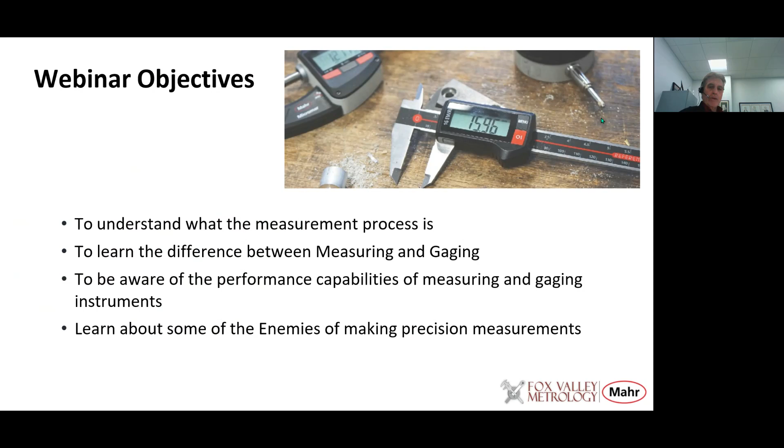Well, good morning everyone, thank you for attending today's webinar, and thanks for the introduction, Jane and Amy. What we're trying to do today is give you a little background about the basics of measurement. Measurement's always a fun topic for me, but really we have to think about what's happening to make a good measurement. Today we'll talk about what the measuring process is, learn the difference between measuring and gauging—terms we often use interchangeably but which really have differences. We'll look at the performance capabilities of different measuring and gauging instruments, and then look at some of the enemies of making precision measurements, because nobody wants to lose microns during their day, maybe drop them on the floor and slip on them as we walk by. So we have to keep those microns under control.

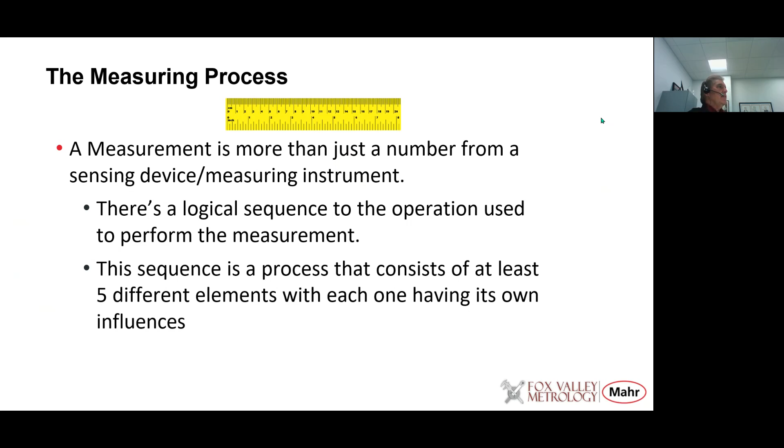So what is the measuring process? I think the measuring process is more than just a number from a sensing device or measuring instrument. We talk about 5 degrees Fahrenheit or 30 inches long—basically a number and some standard unit, either inches, millimeters, degrees, or whatever. But really, to get that number, there's a logical sequence to the operation used to perform that measurement. This sequence is a process, and I think that process consists of at least 5 different elements, each with its own influences.

So if you look at this photo, this is one of our operators out on the shop floor at Mahr measuring some bezels for dial indicators. If you look at this picture, how many different elements make up this measuring process? Let's take a quick look and see if we can find them.

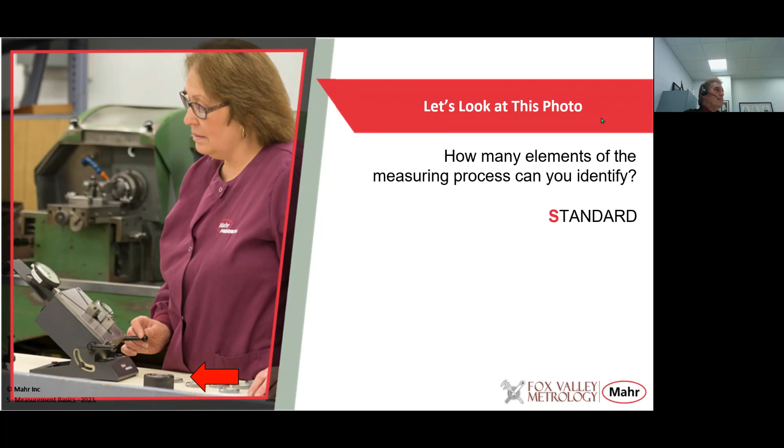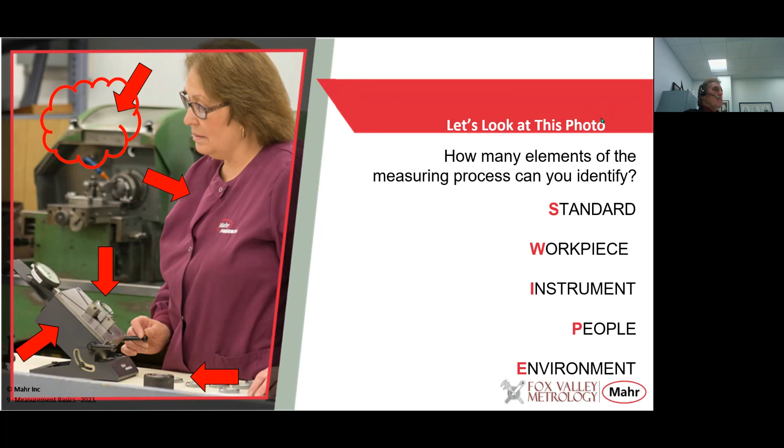The first one we have is, in this case, a standard—this is a master ring, which we have to have as some type of reference to begin our measurement with. Then we have the workpiece itself, the part that we're measuring, and the instrument or gauge or tool that we're making the measurement with. We need to have an operator, somebody making that measurement, or the people involved. And finally, what surrounds us here is the environment, and the environment is sometimes the biggest influence on the measuring process.

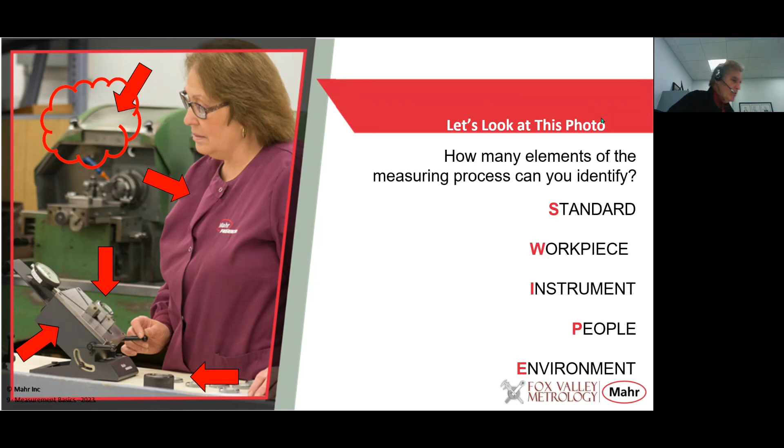One thing that's fun to remember is that an easy way to remember things is by an acronym, and you can see what it is here: SWIPE. The measuring process consists of 5 different things, which we can remember by thinking about SWIPE.

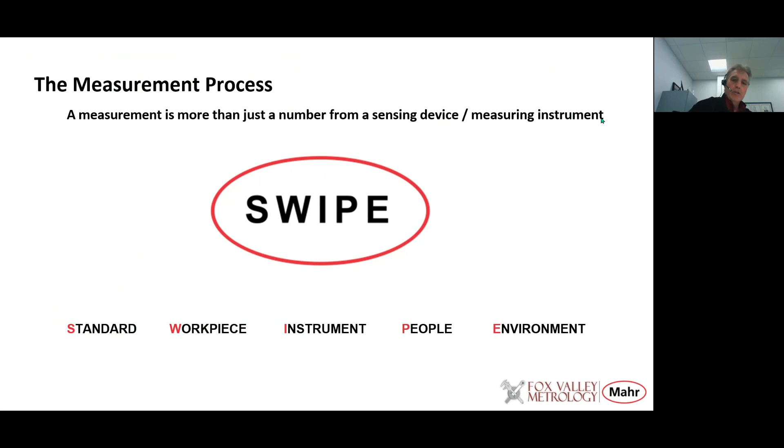The standard, the workpiece, the instrument, the people, and the environment. A little cheat sheet we like to use in the gauging world is that the instrument, the I, is only 1/5 of the measuring process. So a lot of people call up and say your gauge isn't working right, but our technicians are trained to look at the whole measuring process to make sure there isn't something else influencing the instrument to produce inaccurate readings. If you can remember SWIPE, I think you can go a long way to improving the measuring process.

Now let's take a quick look at these 5 parts. The standard is the master. It could be a gauge block, a master ring or disc, some pins. It could be the internal scale that's inside the micrometer or the caliper or the length measuring instrument.

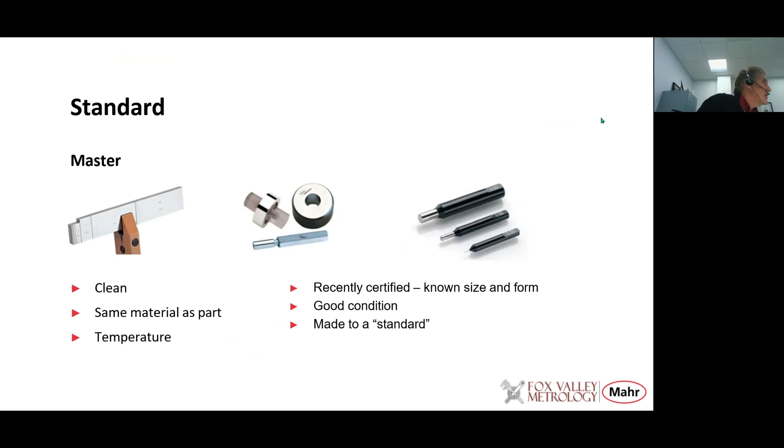But the standards all have to be clean. We like them to be the same material as the part, all stabilized to room temperature. You should know that they've been certified, and you know what the size and form is. They're in good condition, no burrs or rust or nicks on them. And usually these standards are made to some international designation, like a DIN master or an AGD ring, or whatever the ANSI standard is for these standards.

The same characteristics also apply to the workpiece. It should be clean, same material as the master and the gauge, in good condition. You want to keep it clean—any burrs, oils, grime from the machining process should be cleaned off of it.

It should be temperature stable, which means if it's some process that produces a lot of heat in the part, you should give it a minute or two to stabilize and get the temperature down. You should understand the form and finish of that part and how they can affect the measuring process, and be aware of any special characteristics—is it a thin wall, or a compressible material? What's the surface finish of it? All of those things can affect the measuring process.

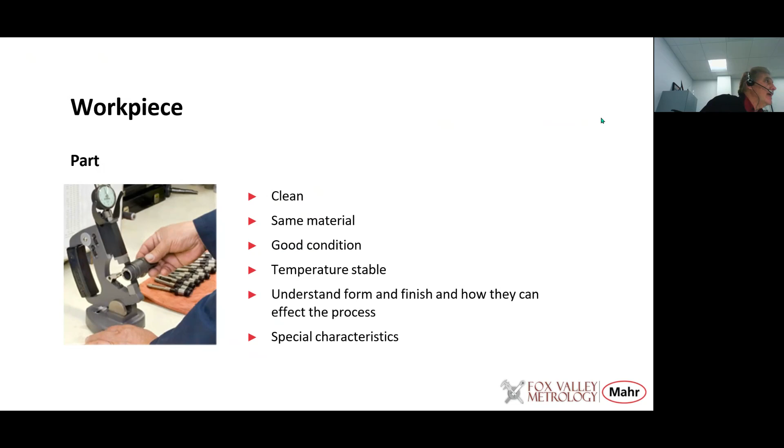Here's an example of how geometry can affect a measuring process. Most micrometers, calipers, two jet air plugs, ID fixed plugs, and so forth are two-contact systems, and they're great for measuring parts which have an even number of lobes, like the picture on the left upper there—you can see that has a major and minor diameter, or an even number of lobes. So that 2-point contact system is going to do a great job measuring the smaller or larger diameter of that part.

But if you have a part that has an odd number of lobes, in this case 3 lobes, that 2-point contact system is not going to do a very good job of measuring the part. It's going to produce the same diameter anywhere as you rotate that gauge through the part. So it's important to understand the form of your part to ensure you have the proper gauging system for it—we can make a 3-point measuring system. These are items where, for example, you're making two parts, an ID and an OD, and they're not fitting together even though the gauges say they are right. It could be a form error causing that problem.

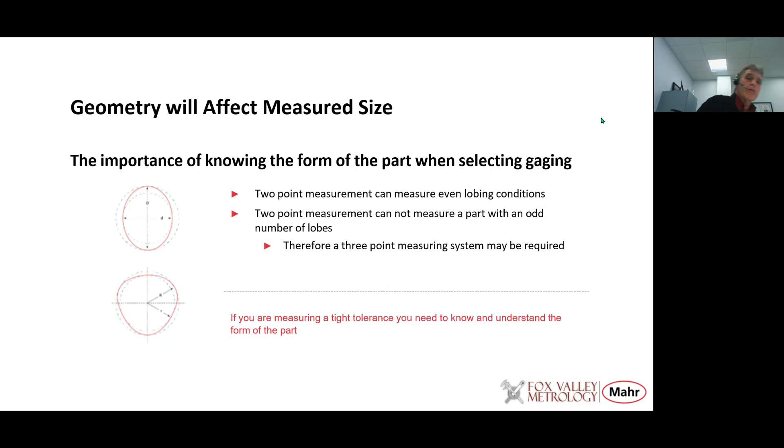Let's take a look at the instrument. Usually the tighter the tolerance, the capability of the gauge, the more mass it has—so bigger is better when it comes to gauge stability. It should be mechanically sound, everything tight, appropriate for the tolerances being measured. The gauge should be repeatable, have the proper resolution, and make it as simple for the operator to use with as little operator influence as possible.

Sometimes instruments are made to a standard, especially if you're measuring compressible materials—they should be made to the proper gauging force, contact diameter, etc. And that type of gauge takes into account any special characteristics of the part.

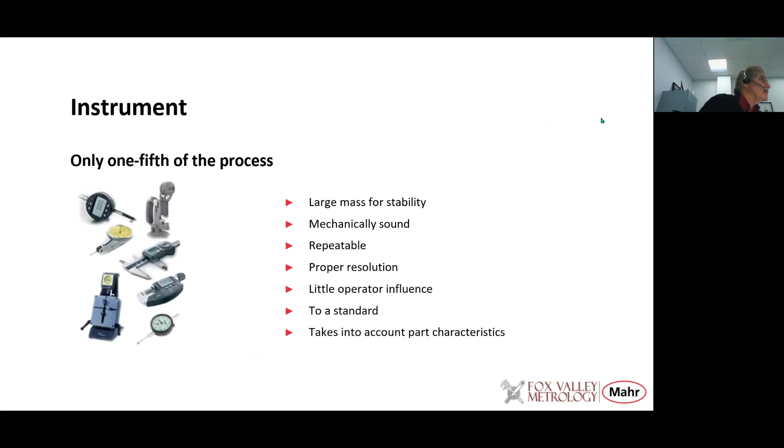Now, the part can have surface and form errors, and these can show up with air gauging, for example, because with an air gauge we use back pressure to measure the diameter. If that surface is too rough, the gauge can actually think it's measuring further down into the surface than the peaks, whereas a contact gauge on the right here measures only the peaks. So again, it's important to know the surface of the part, as it affects the gauging process.

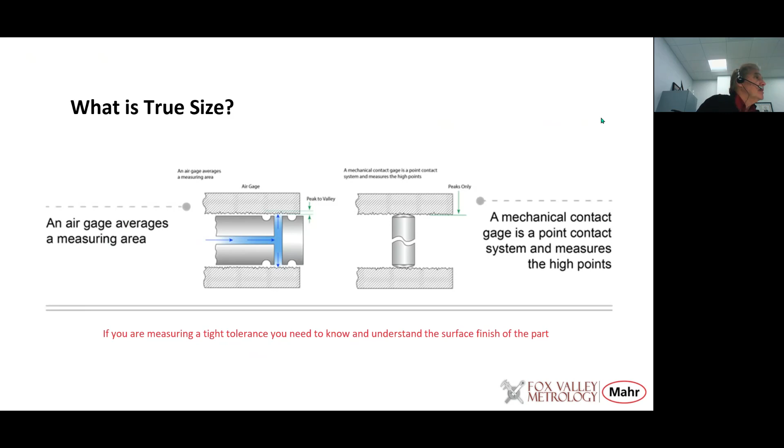With tight tolerances, we need to know what the surface finish is. The people are an important part of the gauging process.

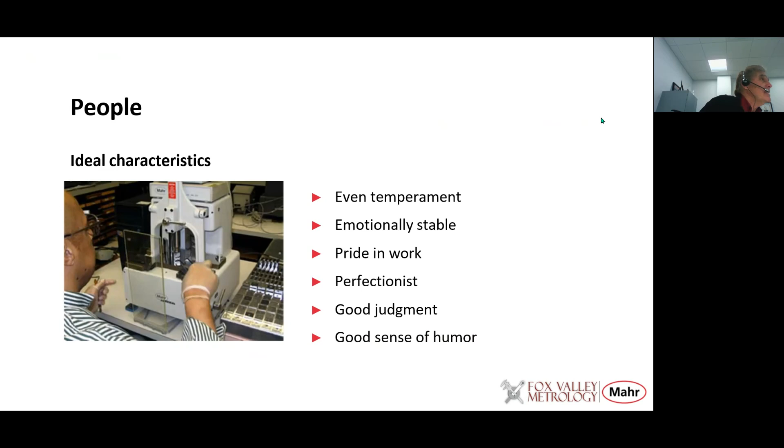You talk about people in a measurement center or a lab somewhere. You want a good, even temperament, emotionally stable. You want them to take pride in their work and be perfectionists, have some good judgment, a good sense of humor, because typically a measurement lab is in the back corner of a facility somewhere. Three or five people might be working in there all day long doing their measuring tasks, and it's a close environment to work with people. But even in today's world, operators are also being asked to become inspectors, and they need to have some of those characteristics.

I like to think that a good source of inspectors and people working in measurement centers are people who come from submarines. They probably have the same skills. They work in close quarters, doing life and death situation types of activities. I think they have a great skill to become a dimensional lab technician.

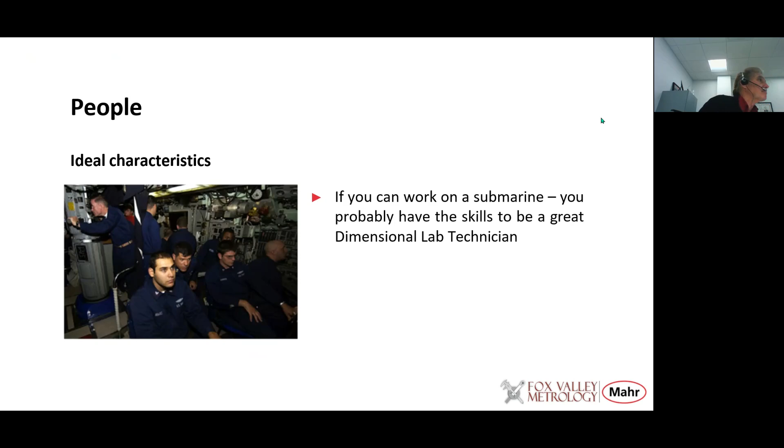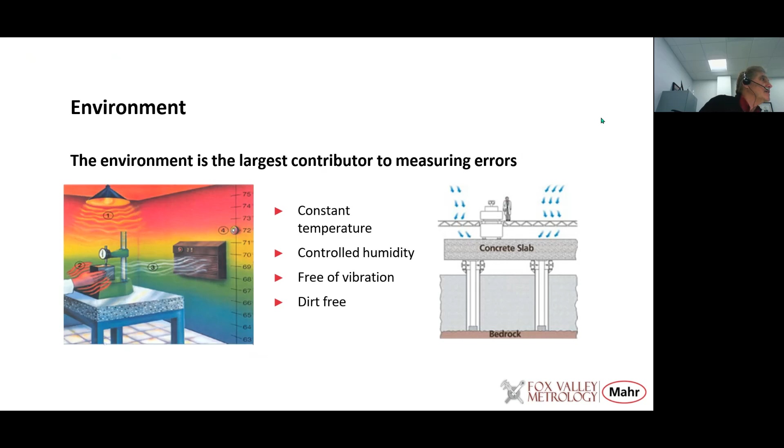And then finally, part of the measuring process is the environment. Sometimes it could be the largest contributor of measuring errors, especially in submicron types of measurements, because you want that lab or that area of measurement to be a constant temperature, with no air flowing causing different gradients of temperature around. You want the humidity to be controlled where it's not too damp to cause rust, but not too dry to be uncomfortable for the user, free of vibration, and of course, free of dirt. So you have to take good care to make sure that your measuring environment is proper for the tolerances of the parts that you're trying to measure.

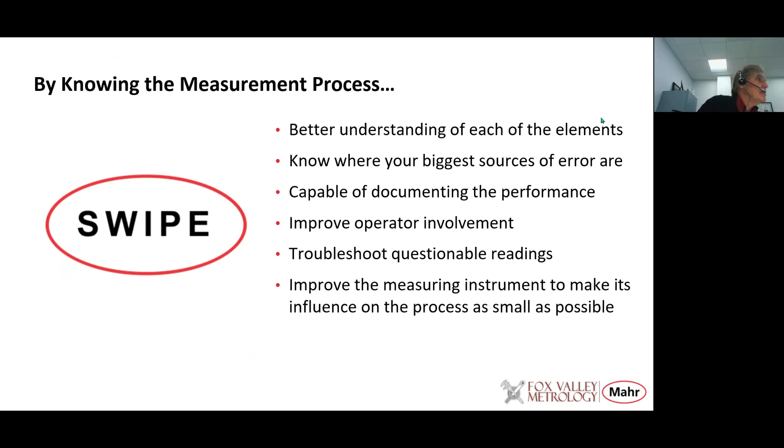So by knowing this measuring process and understanding it, I think you can get a better understanding of each element, how it can affect the process, where those sources of errors are. Maybe you can use the operator to find some of those sources of error. It can help you troubleshoot questionable readings, and I think it can improve the measuring instrument to make its influence on the process as small as possible.

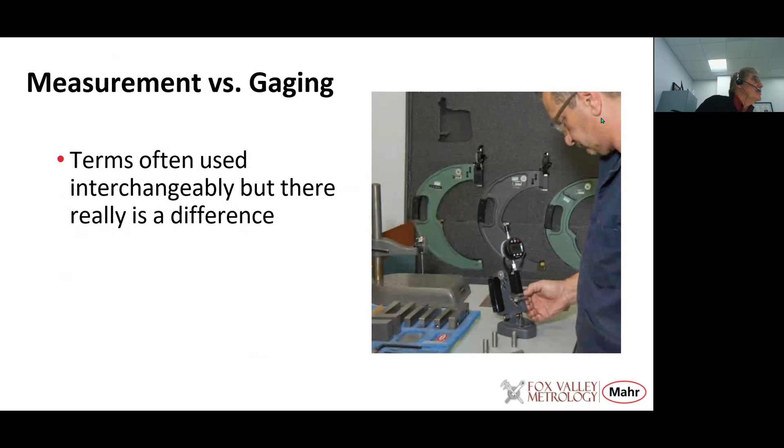Now let's talk quickly about the difference between measuring and gauging. Often these terms are used interchangeably, but there really is a difference between them. Measurement is a process of determining a dimension of a part by comparison with a standard, usually an internal standard, so it's a direct reading instrument. Whereas gauging is a process of determining whether a dimension is smaller or larger than the standard. It usually has an external standard, so it's an indirect reading instrument.

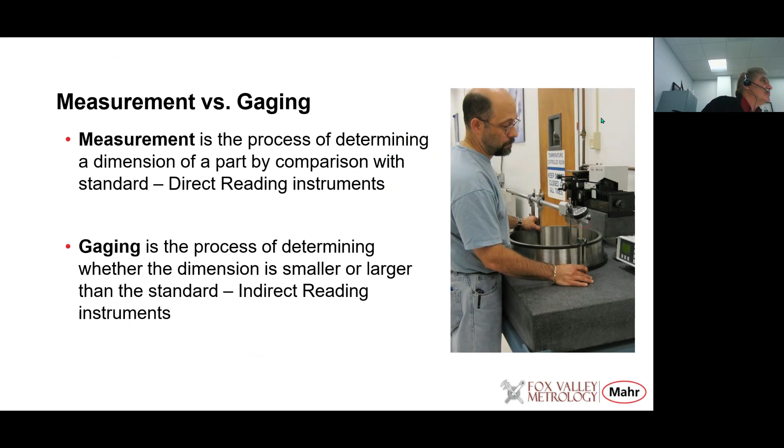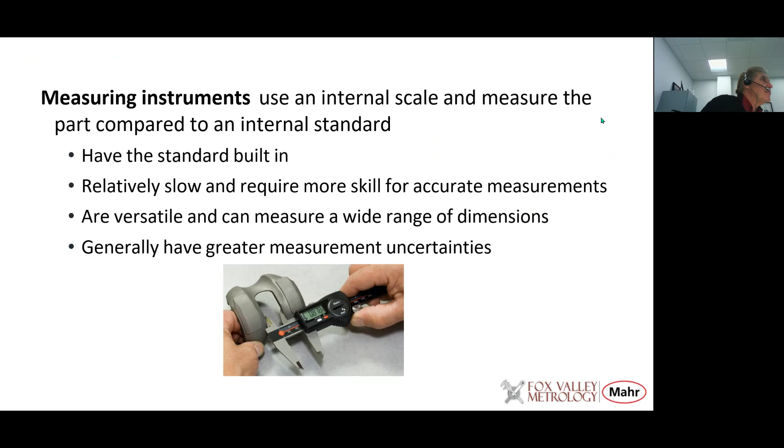So measuring instruments use an internal scale and measure the part by comparing to an internal standard. They have the standard built in. They're relatively slow and require more skill for accurate measurements. They are versatile and can measure a wide range of dimensions. And because of so much operator influence, they generally have a greater measurement uncertainty.

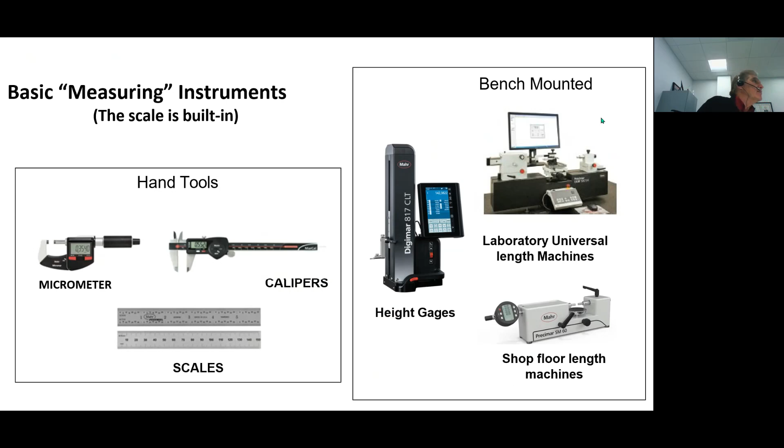So what are measuring instruments? These have the scale built in. These are things like micrometers, calipers, hand scales. These are all measuring instruments. But you can get good results from a measuring instrument when they're dedicated to the process, like height gauges. You can make universal measuring machines, which have some very high performance, and you can see there's a lot of mass involved with that. You also have shop floor length measuring machines. So these are measuring instruments. They have the scales built in, and they're measuring the part with that internal scale.

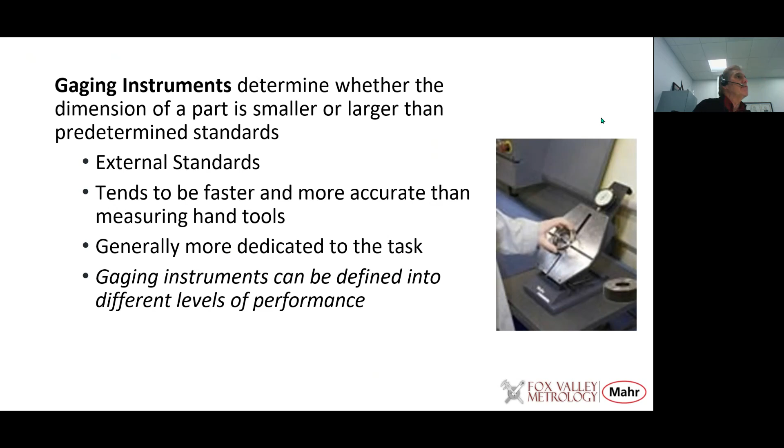Now, gauging instruments are a little bit different. They determine whether the dimension is smaller or larger than a predetermined standard, so they have an external standard. It could be a gauge block, a ring, or a disc. Now, these gauges tend to be a little bit faster and more accurate than measuring hand tools because they're more dedicated to the task. And I think gauging instruments can also be defined into different levels of performance.

First, you have your adjustable variable gauges. These are things like an adjustable bore gauge. They have lots of adjustable range, but once you adjust them to a specific size, they have relatively short comparative measuring range. They're adjusted to a specific size with limited measuring range. They can provide the actual deviations. With an adjustable bore gauge, the operator has to sweep through the part, so they have some operator influence. It takes some skill, but you can get good results.

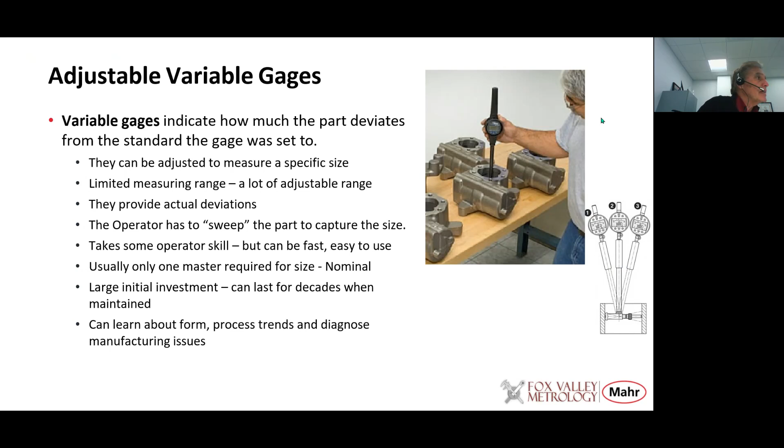They require a nominal master for setting. They tend to be more expensive than a caliper, for example, but if you can maintain them, they can last decades. And because they give you variable information, you can learn more about form, process trends, and diagnose manufacturing issues. So these are some adjustable variable gauges, typically ID adjustable bore gauges. Some ID-OD gauges are also variable gauges where you have to swing through the part to get the dimension that you're looking for.

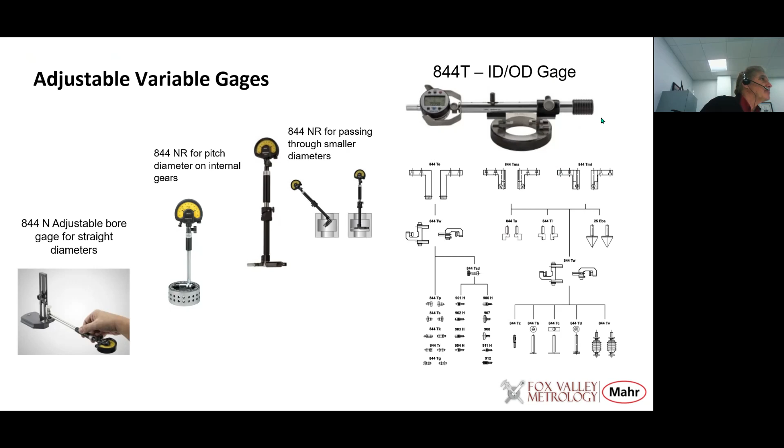Then we have the adjustable variable gauges, but they have a reference built in, or a backstop. So again, they're very similar - they have a lot of adjustable range, short measuring range, but because they have a backstop, the operator doesn't have to rock the part to make the measurement. The part just locks into place. It's very easy for the operator to use, no operator influence, and you can get some very good results.

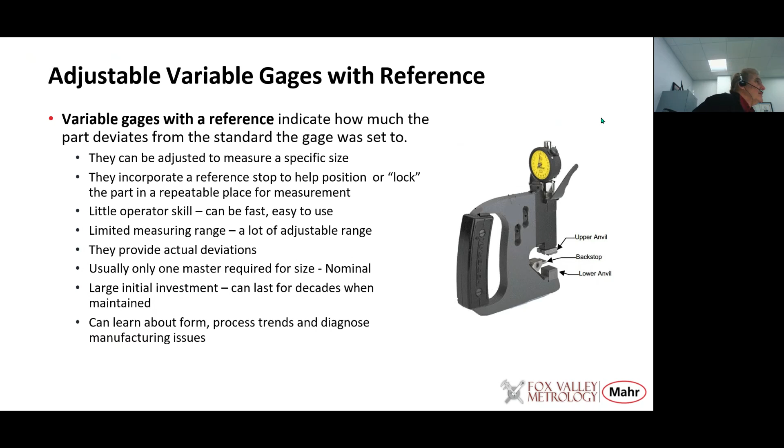And these gauges also can last decades, and they give you variable information, which is very important to diagnose manufacturing issues or control the quality of your part. So these are adjustable variable gauges with reference - your snap gauges, your bench ID, OD gauges, even a height stand with a backstop will improve the measuring process.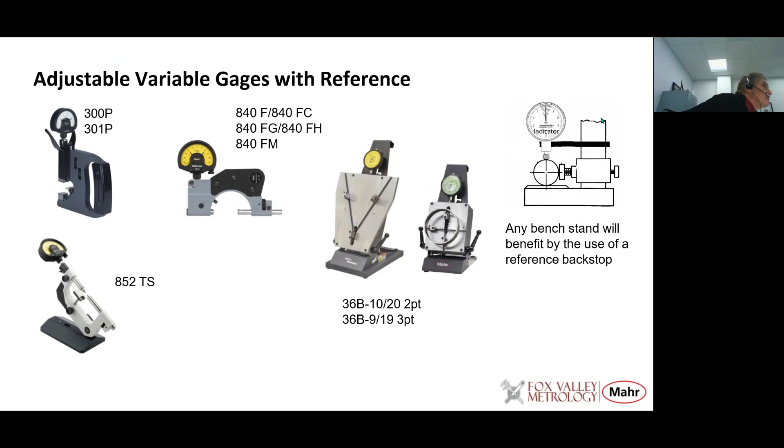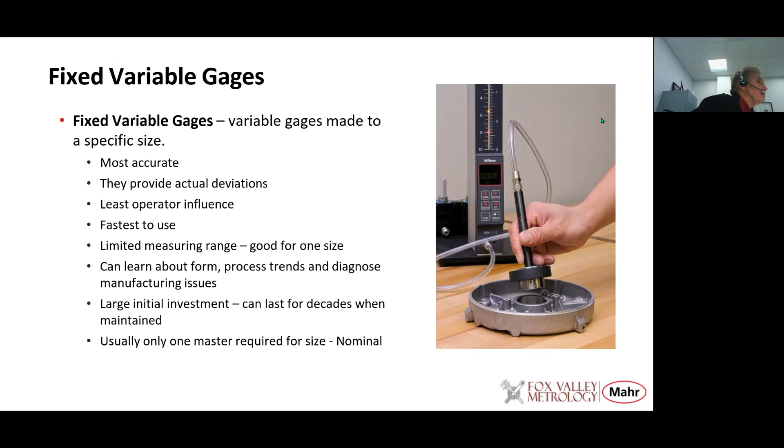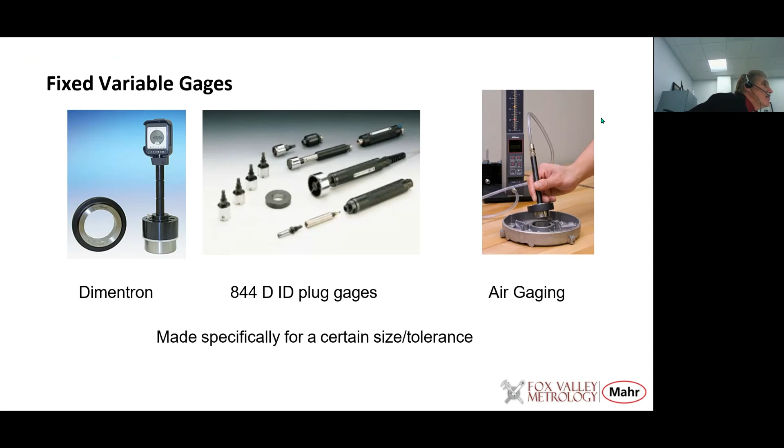And especially if you're measuring a lot of parts, this is the way to get the best results from the gauges and your whole measuring process. So our Dimentron plugs, our 844D ID plug gauges, air gauging - these are all fixed variable gauges made to specific size, but fastest and best results.

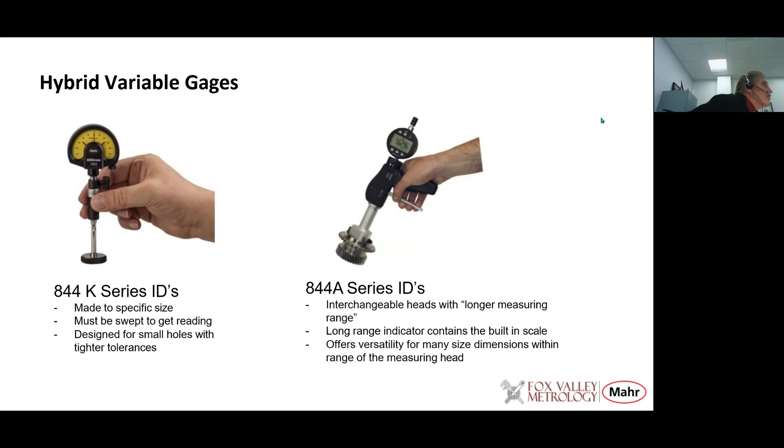You get some hybrid gauges in there too - that's a bit of a combination, and we do that. But these have some operator influence, and it's like I said, a cross between a variable gauge and a fixed plug gauge, with some intermediate results.

But you can classify your types of gauges and your needs based on tolerances, speed of measurement, operator influence, performance, and you can make yourself a matrix based on those things to determine which might be the best gauge for your application.

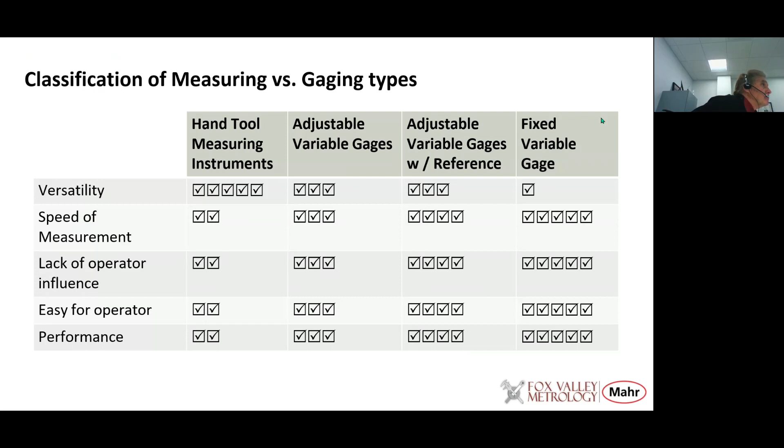So which one do you want to use? Well, you can lay that chart out, and based on accuracy, cost, time, ease of use, and so forth, determine which one might give you the best results, and which is the right one for your measuring problem.

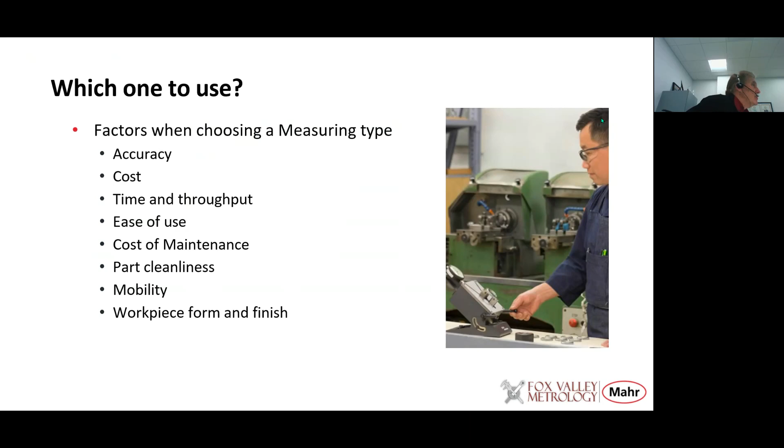And then we can take a quick look at some of the enemies of precision gauging. It's a measuring war out there in the shop, and we want to do the best we can so the enemy doesn't influence our measurements and try to steal our microns and rob your gauges of their best performance. So what are some of the enemies of precision measurement?

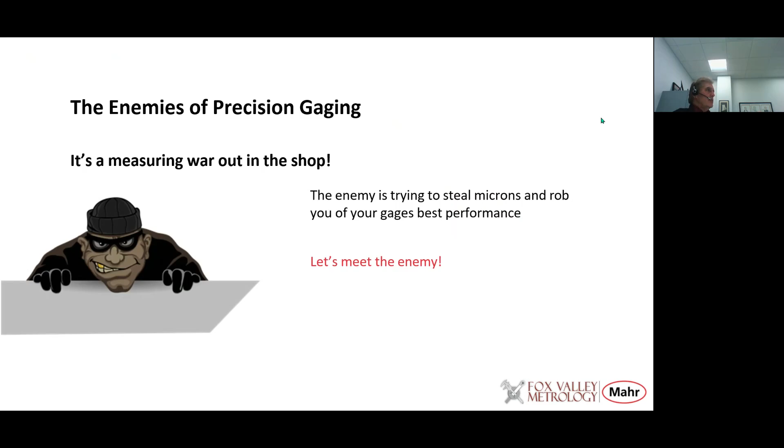Well, wear's a big issue with gauging or measuring? You have worn contacts, you can have worn body diameters, you have worn anvils. The workpieces should always be fully positioned under the measuring contact. And when the contacts are worn, you can get an offset or a deviation in your measurements, especially with measuring instruments.

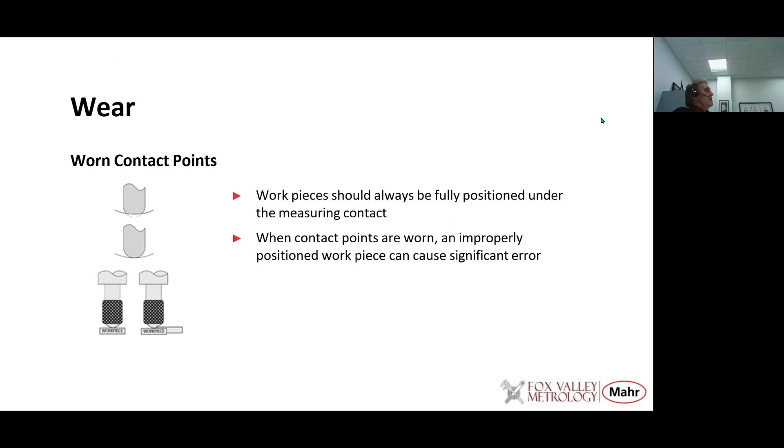If you have some wear in a gauging instrument, since you're comparing the part to the master and that contact measured both the same way, it's less of an influence, but it still can pose a problem. So consider wear as a potential enemy for stealing some of your gauging performance.

And using different types of masters compared to the part can pose a problem. Here's a grossly worn snap gauge, for example, that's been used measuring a round part, and that round part has put a little indentation into the anvils. Now, if we use a gauge block to master that gauge, you can see the offset that's going to be there. However, if we use a master pin or something, you probably wouldn't see that offset. So different masters and different workpieces can cause you deviations in your measurement.

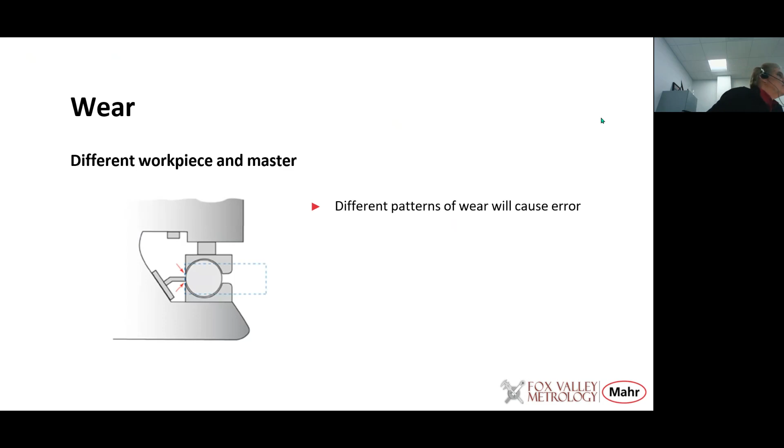You should wipe the part, you should wipe the anvils of the caliper before you make your measurements. And that's the same with any gauge. So dirt's a big problem.

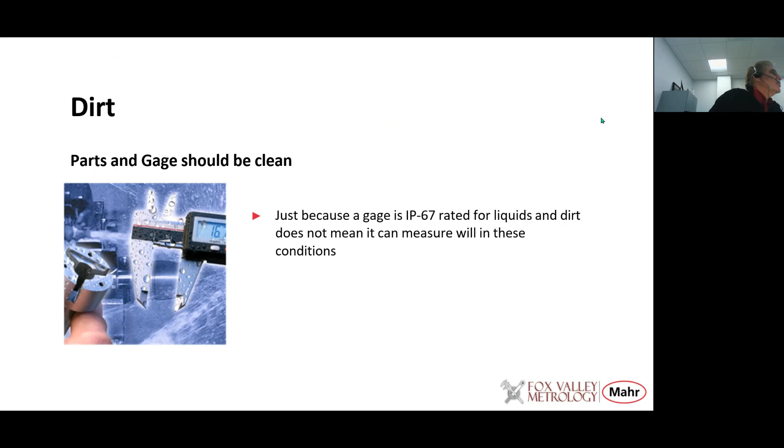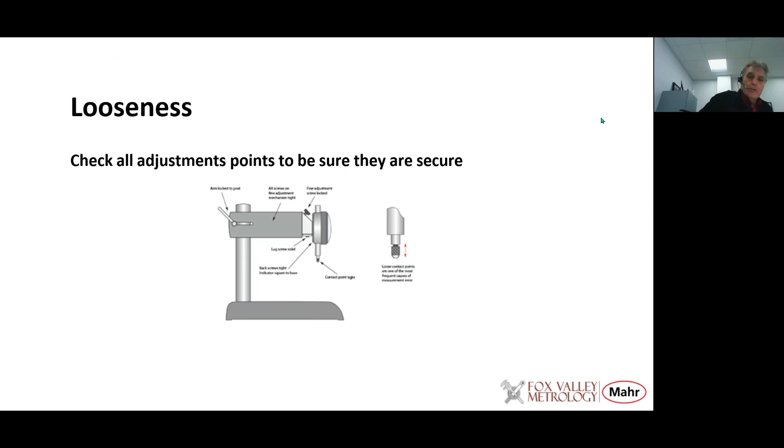Looseness is a potential problem. When you look at a height stand such as this, you have numerous joints of contact. You have the column going into the base, the arm attached to the column, a fine adjust, a backstop on the indicator, which is attached to the fine adjustment, and you have a contact point. All these things, if they're not tightened, will be loose and they'll show themselves as non-repeatability in the measurement. So every day, before an operator uses a gauge, it should be checked for looseness to make sure everything is tight, so that looseness will not influence your results.

The same thing applies when you're using a caliper or a micrometer. Some people have real strong hands, and some might not have such strength. So you want to make sure you apply a gauging force that's good enough to make contact, but you don't want to force the anvils onto the part where you possibly can deflect the reading of the gauge.

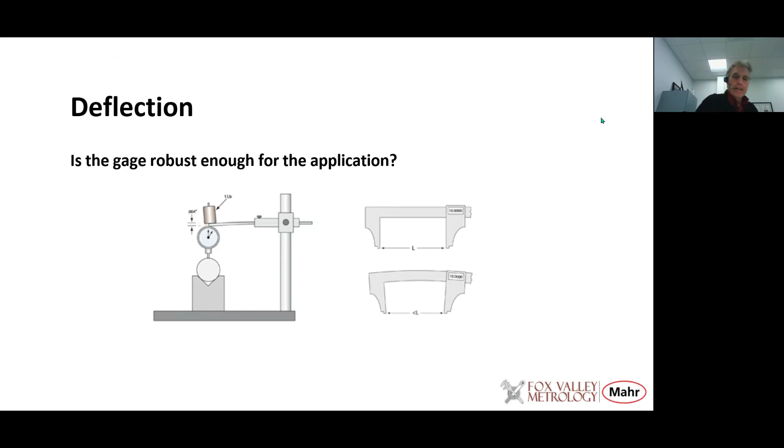Gauging pressure on the part can be a big influence. When you're compressing or measuring compressible materials such as paper or some Teflon, the weight of the gauge will compress the material and influence the reading. So there are standards out there where you can define what the dead load weight of the contact should be, and what the diameter of that contact should be, so that everybody has the same gauge. And if that part is measured anywhere in the world, they're all going to get the same results. So we have to watch out for gauging pressure sometimes.

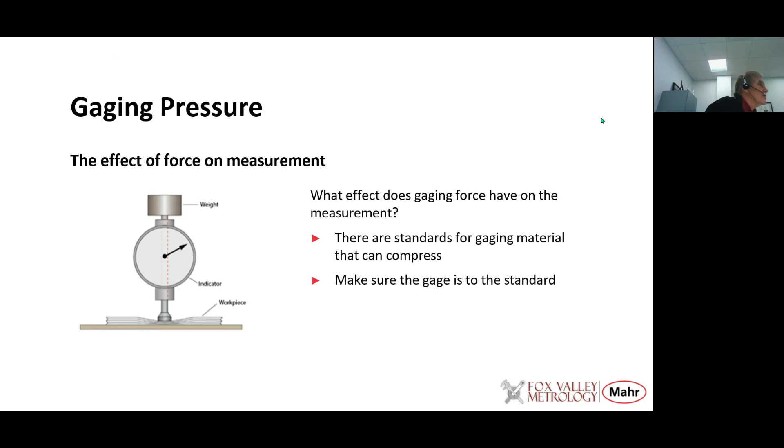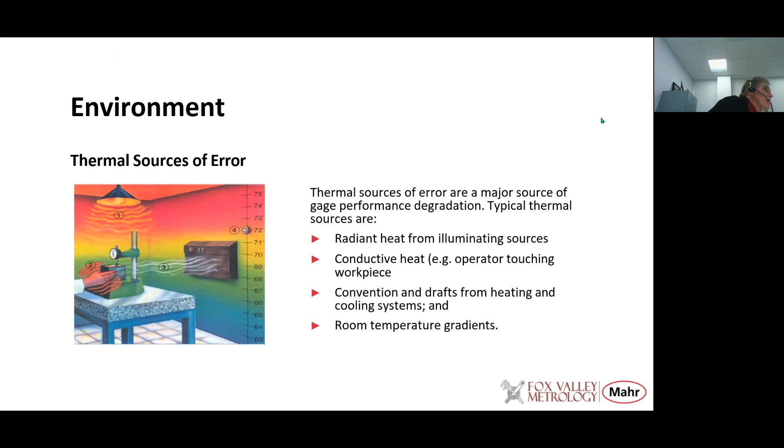Like we talked before, the environment is a big source of error. You can't just put an air conditioner into a room and assume you have good enough temperature to make precision measurements. Everything influences the environment - lights, bodies, hands, drafts, they all influence it. That environment relates to the part, and can cause the part to grow or shrink, or the gauge to grow or shrink, based on the temperature. So watch out for the environment as a problem.

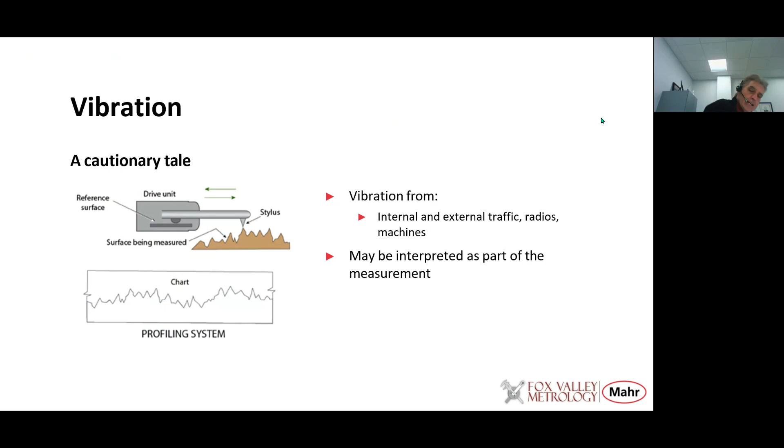Vibration can be a problem, especially when making surface finish measurements. Typically a surface gauge is used on a granite surface plate, or a precision one might have a vibration isolation table. But you can have forklifts driving by, or your company might be next to a highway, and vibrations can get into the measuring process when using a surface finish gauge, especially a gauge doing a skidless measuring system. So it's good to check the vibration, which you can often do by making a measurement on a part but not tracing it - just let the probe sit there and watch what it sees. If you see a lot of vibration, you should take steps by putting in isolation pads or finding out where that vibration is coming from, in order to get a good surface gauge result.

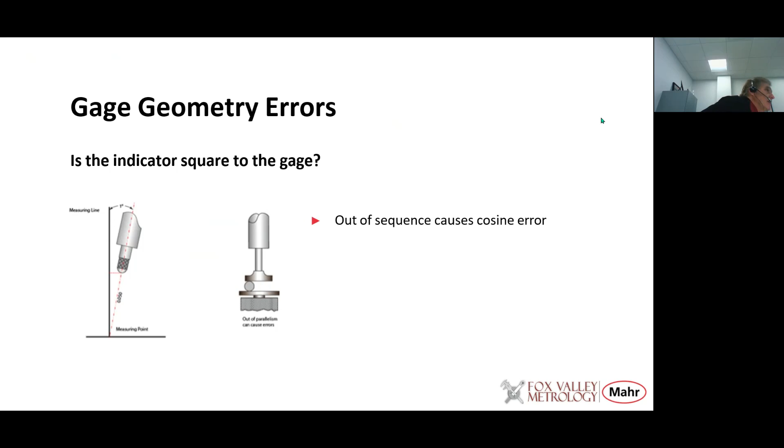Some gauges can have geometry errors. If the contact is not moving perpendicular to the measuring surface, or the anvils of the snap gauge are not parallel, you can get a cosine error, you can get flatness error - all of these things can affect the gauging process. We talked about the form errors before with 2 or 3 point measuring systems. We have to keep our eye out for this.

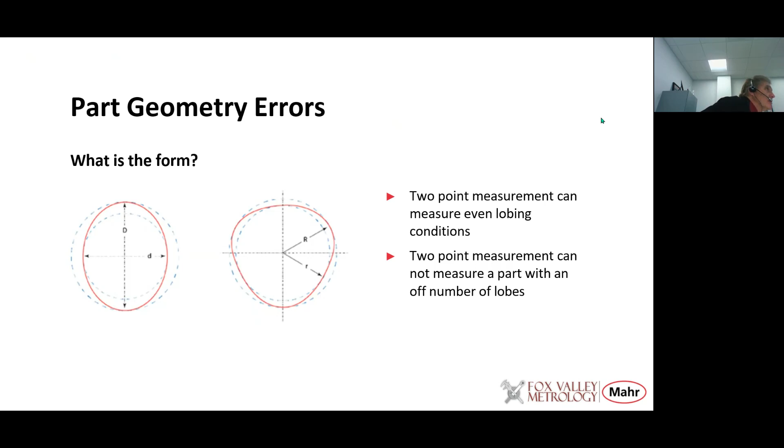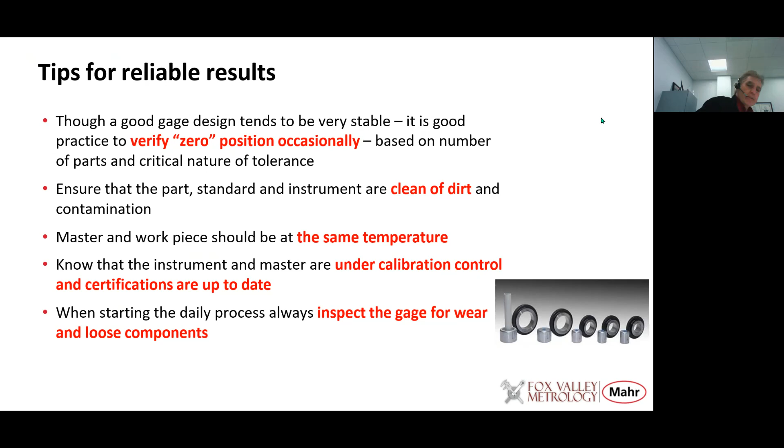I think by knowing the enemy, you have a chance to defeat it. In today's seminar, I think we've learned what the measuring process is, understand that there are reasons for measuring and gauging and which one to choose. It's good to match the right gauge or measuring instrument to the application. And we always have to keep an eye out there to keep our measuring process at its peak.